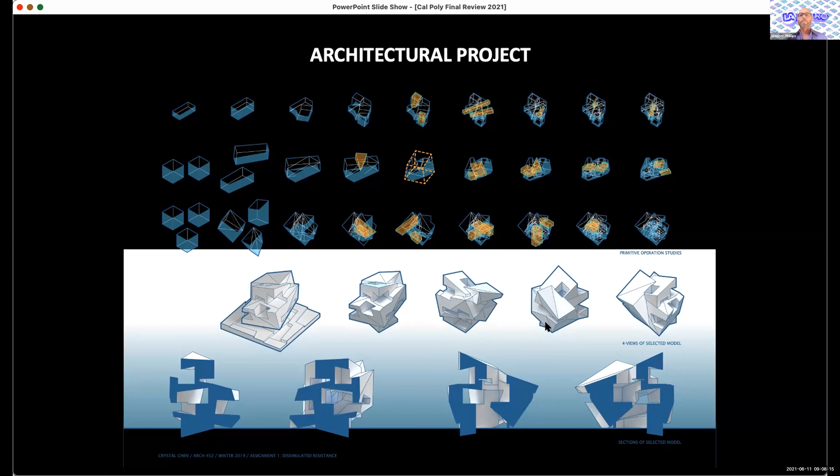So we then developed these ideas of an architectural project to kind of enliven their architectural skills, mainly thinking about spaces in between, inside outside spaces, and also how those spaces might relate to a site or an environment in a very abstract manner, pretty much surrounding mostly computer solid modeling. That's just to give them some language skills and some interests and some graphic sensibility that's all their own.

We then add in a building program separately, comes in later. And this one is actually a smaller program for us. Usually we've gone up to 1.25 million actually for our high rises, but this one is a 210,000 square foot low rise project. It's a multi-income housing. It also includes a small hotel with boutique and transient housing built in.

Also has social and health services available on site alongside creative office spaces and retail. There's also a substantive - half the program is provided for public landscaped open spaces and spaces in between, so courtyard type spaces, things like that nature. Pocket parks, 210,000 square feet, matching about the 210,000 square foot of the building itself. So we're looking at about a 50% porosity.

Parking underground with mechanical, there's about 60,000 square feet of public commercial program, 50,000 square feet of flexible creative office space, and 100,000 square feet. So half the program is housing. Half of that program is really mid-low income affordable housing. And then it's matched with transitional family housing, high mid-income housing, and then the boutique and the transient hotel.

The point is to try to create a very multi-income environment, very mixed use, and that has been sited in Echo Park, Los Angeles. Those familiar or unfamiliar with Echo Park, it's a very beautiful little neighborhood near Chavez Ravine, near downtown. It's had a very long history, actually very multi-cultural and multi-ethnic, but it's been struggling with gentrification for the last 15, 20 years. There's also challenges with the way the city's been treating the homeless, which came to a head at Echo Park Lake earlier this year.

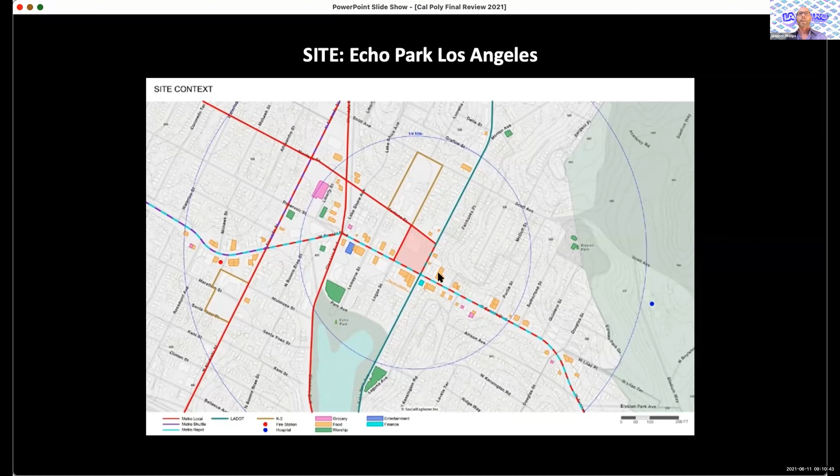We picked this larger lot, which is mostly a parking lot, but also has a Walgreens and an organic food store. This gives you an idea of the location, kind of an artist bohemian community, all mixing together. We're right in this big corner location, trying to keep ourselves within the 4-story maximum of the local neighborhood, about 45 feet high.

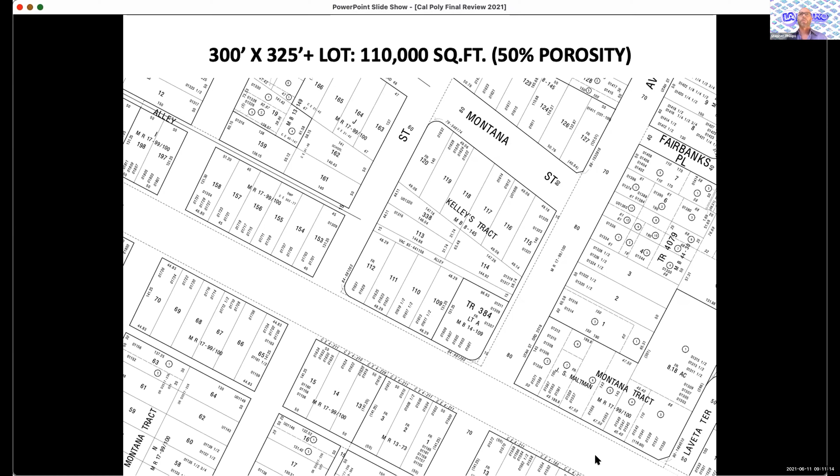This gives you an idea of the tract. Here's Sunset, here's Echo Park. There's basically a small school over here, mostly residential on the backside, and then there's the commercial area with a very pedestrian sort of neighborhood on the front.

So with that said, the focus is a little bit on these spaces of the in-between, things that happen between the different programs, and how you can turn those into spatial opportunities. We look also at architectural concept, form and material. We look at urban concept of site strategy. And then ultimately there's a socio-political conversation that comes up, in my opinion, surrounding organizational and programmatic concepts as well.

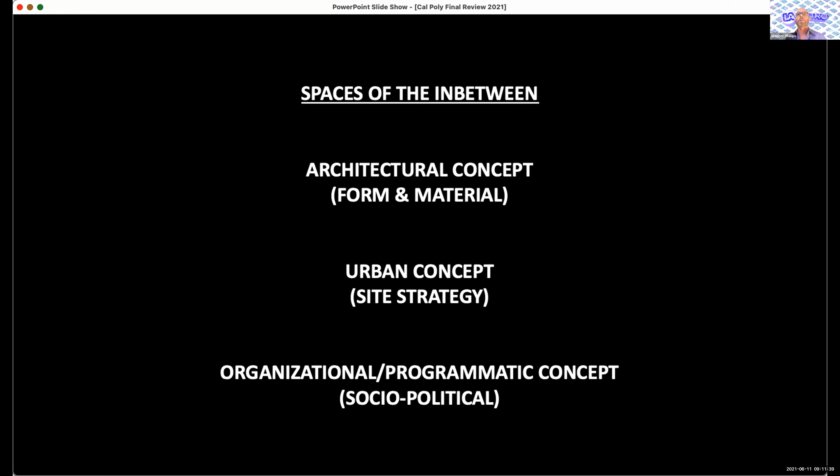Hello, everyone. You see the screen? The slideshow? Okay, great, perfect.

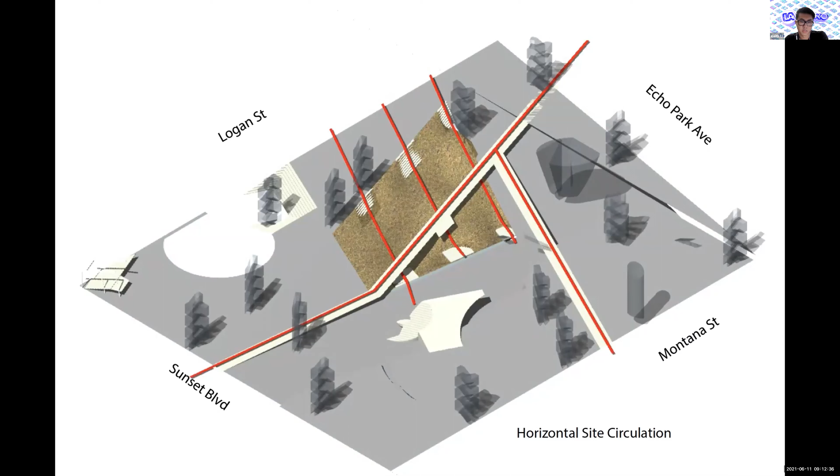Hi, my name is Keith, and for this proposal, I am looking at the idea of starting from the ground, having a softscape in the center of the site, and having a path that cuts through the site with multiple points of entry and access, and various ways of vertical circulation that connects to the ground.

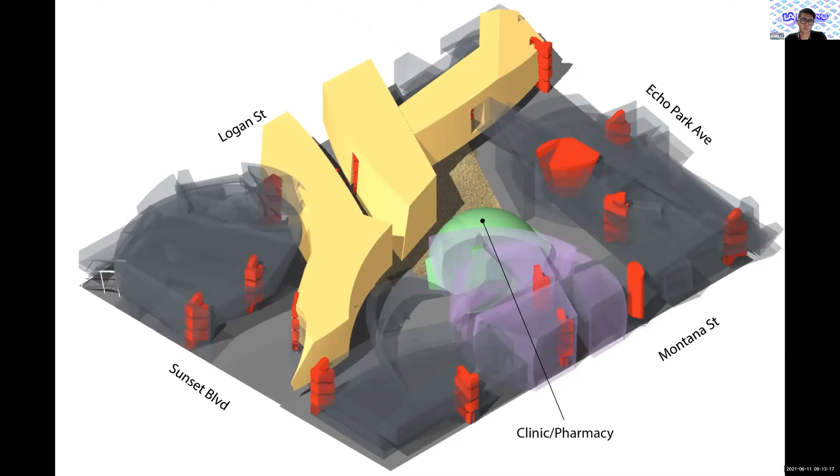The housing block will be near Logan Street, weaving to Sunset Boulevard, and facing Montana Street is a transitional housing and hotel. In between the housing block and the transitional housing and hotel is a clinic pharmacy that's open to the public. There will also be offices for different organizations and for the tenants and people living on the site to use.

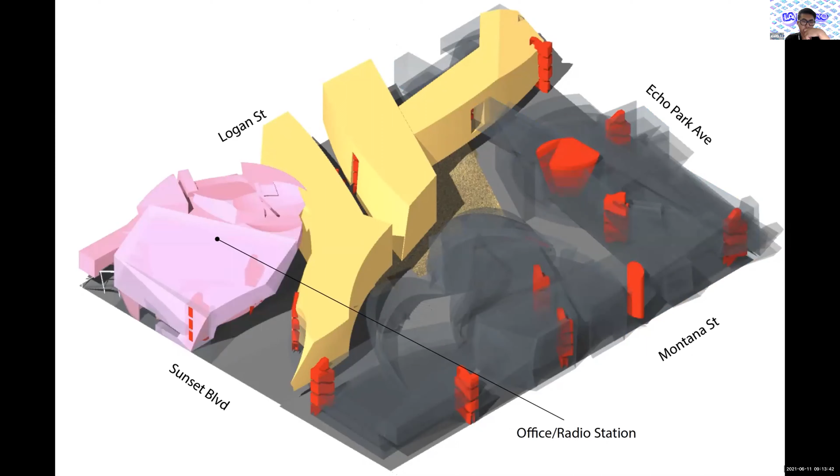A mix of offices and a radio station on the corner of Sunset Boulevard and Logan Street has a connection to the housing block. Having a boutique hotel facing Sunset Boulevard provides an opportunity to connect with a sponsorship kind of relationship with the radio station, a public radio station.

A grocery store facing Echo Park Avenue, and restaurants and coffee shops on Sunset and Echo Park Avenue. On the ground floor, the main path cuts through the site, and the radio station is up on the corner of Sunset Boulevard and Logan Street.

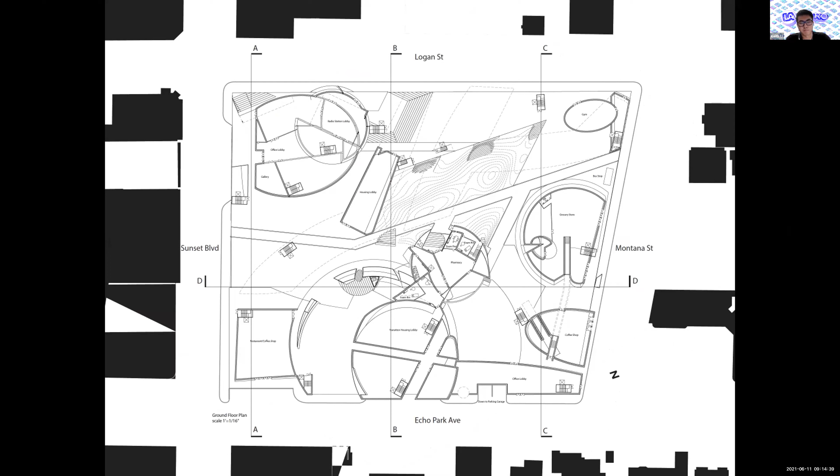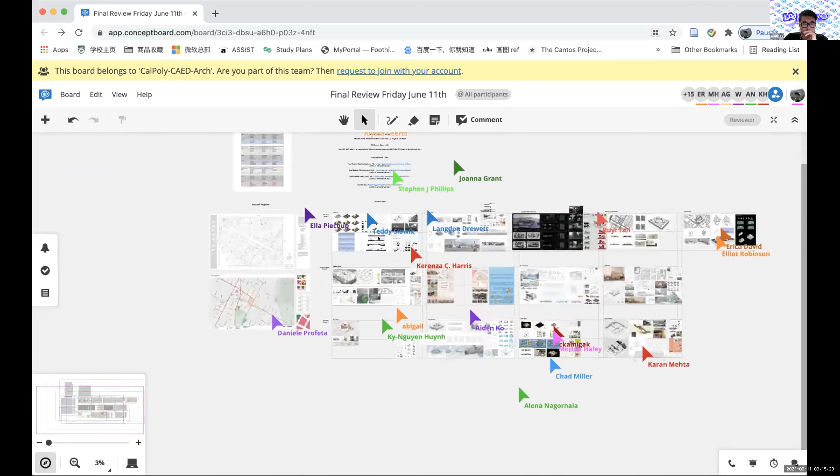There are various sections that show the relationship between these blocks, and elevations that show the four different faces of the streets. This is the concept board.

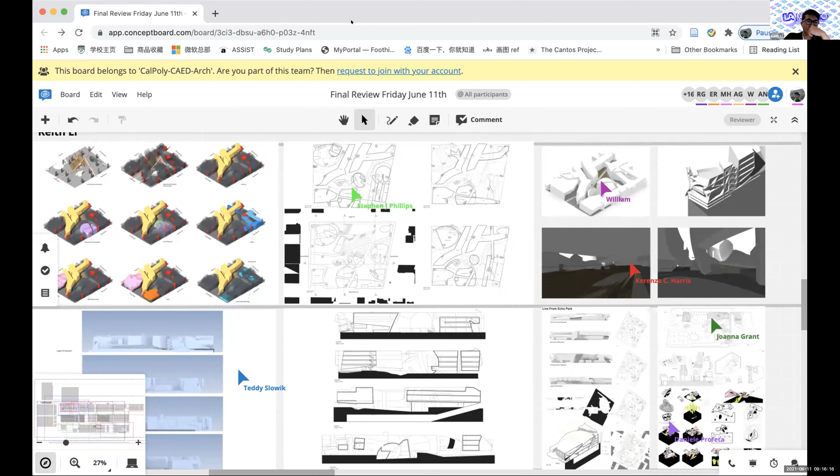Sorry, so you're through with your presentation? Are you? Yeah, I am. Okay, just making sure, because I was wondering for a second if you were ready for us to start.

I have a couple of questions, so I get the formal operations. I even think I understand the kind of distribution of program on the site. But I guess when I first saw one of the earlier images, it looked like you had this series of stairs, circulation towers, almost like a lava lamp, this kind of field of stairs. I thought it was an interesting idea, but I also thought they were going to go all the way down to the garage.

You're essentially saying you have these series of things that take you up from the parking, and each time you come up into a kind of court, sometimes at different levels. Each one can have its own entry level. But it looks like they start from the parking lot up. Is that correct? Or do you see them as kind of cores or anchors that go all the way down? Yeah, the red ones that you're talking about.

This mute thing—so do those stairs go all the way down? Yeah, the red vertical cores take you from each different program down to the same ground level. Okay, I see. Let's go back to the diagrams.

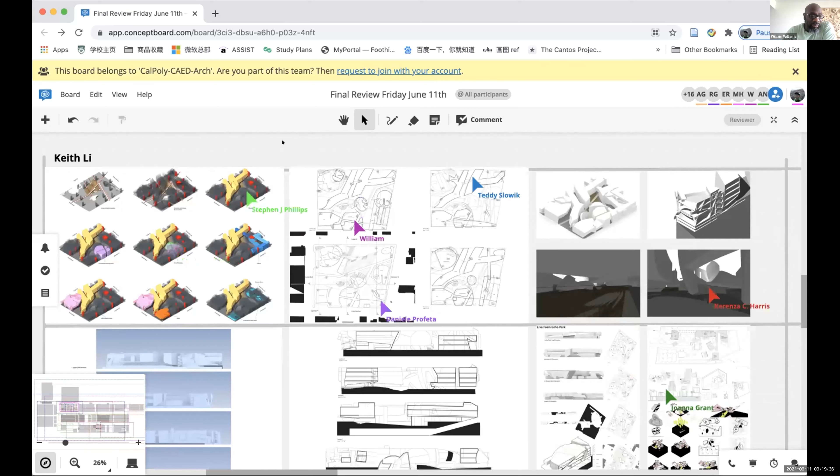Yeah Keith—oh sorry, go ahead. I was just going to say, I think that might be the problem, right? It's difficult to give a critique on something that is so opaque in a sense, right?

You're not really allowing us to make a connection between the operations you're making—let's just say formally—the relationships, the forces acting on your site, and the things you've decided to pick as either input or seed that begin to create a systematic approach to the things you're dealing with. And so formally it looks like something, but you're not exposing the relations or the things you've operated on that created that final version of things, right?

So as a formal diagram, for us it's very difficult to decipher. If you were an artist making a sculpture, you could say 'that's it, I'm done'—you understand it or you don't, that's not my problem potentially, right? But as a student architect, we want to understand, and we want to make sure that you understand the procedure, the process you've established yourself and how you generate form in this particular condition.

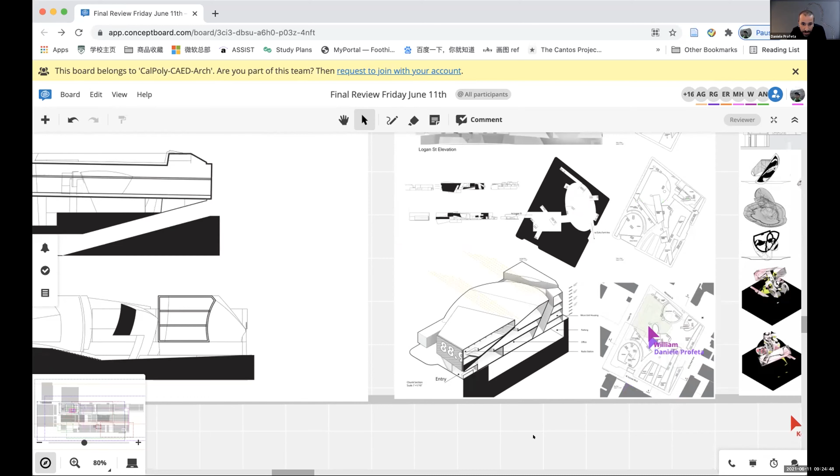And then once you pass this first layer, we're able to notice this much wider and broader organizational system that opens up so many different opportunities in terms of programmatic occupation and ways of using this interior, this courtyard of sorts, which I think is really beautifully highlighted in your sections, right? When we start seeing the possibilities of passing this initial block, this initial threshold, and then we can see the expansion of this interior.

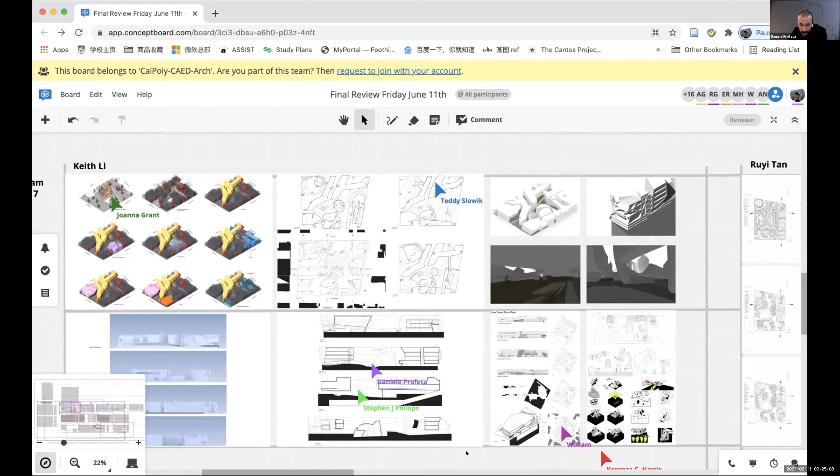Volumetric strategy. So if the studio, besides the programmatic and site logics, was asking you to think through the logic of the in-between, I think there's the seed of a really interesting proposition where you're multiplying the in-between logic. There's the in-between of the entire block, and there's the in-between of each of these individual elements.

And then I also really like the way that, going back to this ground floor plan, you're able in some instances to create continuities between these individual blocks through these axes or figures that maybe are legible as an absence connecting these two larger volumes, for example. So you're able to create this in-between connection not by adding more and more stuff to your composition, but rather by creating gaps that in a way reconnect these masses.

So all of this, I think, is very promising, but I do agree with the comments made until now that once all of this interface is constructed, being able to go in and articulate the potential of all of this organization is really paramount, because otherwise, I'm dying to have you describe how this retail market, for example, this is just a silly point, but how the retail market begins to be broken apart and produce this movement between interior, exterior, and then feed into the transient hotel lobby.

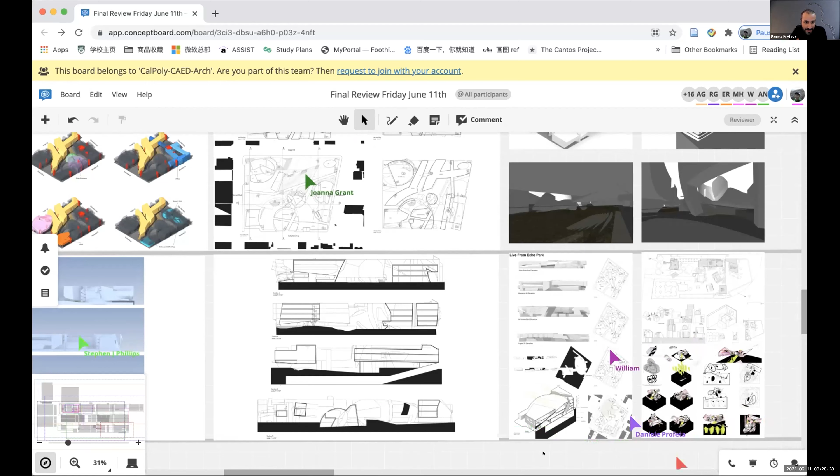What's interesting is that you were just referring to his mid-review boards from April. There's something about the way those were represented and developed that suggests the way you spent your time redrawing or rethinking maybe didn't help or advance your project. Because I look at the radio station, and already back then it was a far more developed building in terms of how it presented itself than what I'm having a hard time finding now. Even the way you gave it a touch of structure, or signage.

Even the idea of putting signage on it had an argument that I don't know if that's still there. It's hard to tell from those elevations. It's almost like you spent a lot of time developing a Rhino model but didn't deliver the logics outside of it. I mean, actually, I like your ground plans. I think your plans are your strength of delivery of conversation. But these were stronger. Even the way you showed your elevations was stronger back at mid-review.

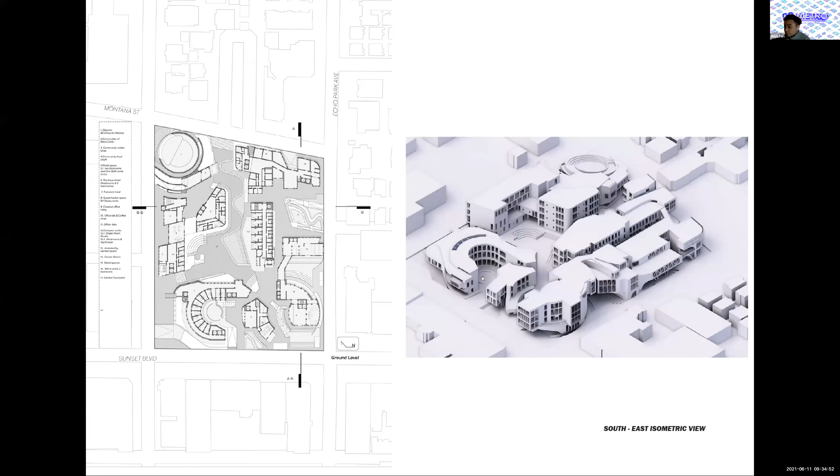Most of the programs start to happen on the second floor. Programs are more about addressing and responding to the site conditions, such as the daycare, because of the schools and institute nearby. This area is kind of quiet, so I was thinking to have the community spaces located here, and then the mixed types of housing and office complex would be located on Echo Park Avenue because of the business happening there.

The intersection shows my idea of cantilevering the building to make it more accessible on the ground level, and then trying to maintain the idea of cantilevering in some part of the building.

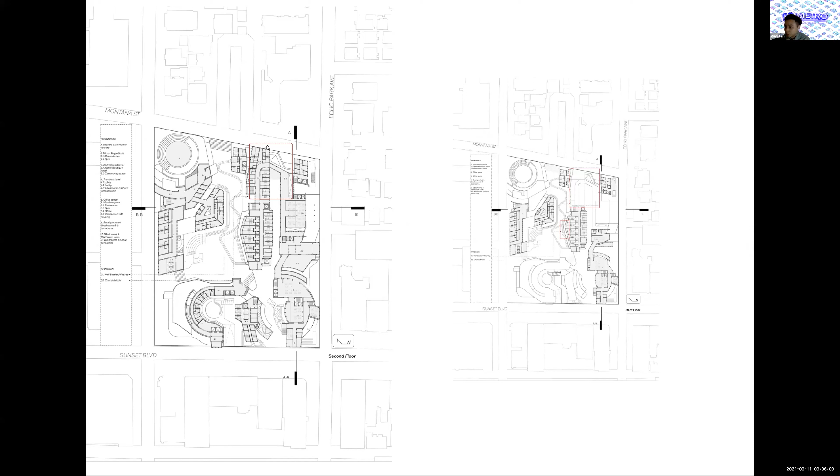In the chunk model, the loft housing is cantilevered up, and some retail and coffee shops are on the ground level. In between is the mezzanine garden space.

I'm using the wooden screen facade on the housing to differentiate it from the office, and these are some attempts at using the wooden screen facade.

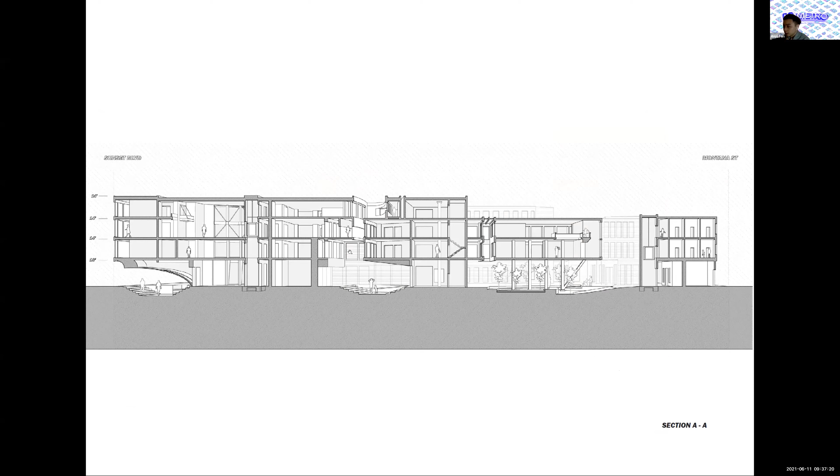Last but not least, the section shows how my cantilever idea plays out, and some of the spaces happen in between and under on the ground level. And that would be it. Thank you so much.

On your big renderings, you're showing a wooden facade, the one that shows the corner of the street on your board, but that one doesn't have holes in it. Is it residential as well? Yeah, it's residential. But it doesn't have the cutout that you're showing on your chunk models. Is it a different strategy? Because I did it in the last minute.

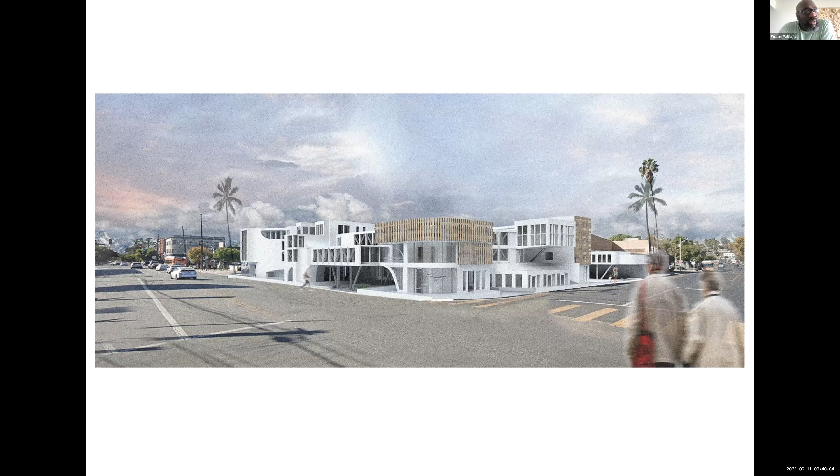I wonder if there's enough. I actually really like setting up those moments, but I'm wondering if it's not a little crowded. Sometimes there can be so much going on that nothing's going on, and I think that could be a really special moment. It's actually kind of an odd moment on a corner like that—odd in a good way. But I think it needs a little more room to breathe, if that makes sense. It feels like it's a little impacted by other parts of the program. But there is something interesting about the scale of the project, and I really appreciate the changes in texture.

I agree with William. I think when everything is operating at 100% everywhere, you lose a little bit of the special moments, as he said. It's hard to visually focus on something. I think you have a good handle on your language in terms of what you're trying to do, and how you're documenting it shows you understand the relationship between your plans, elevations, and section pretty well. So it might be a moment to step back and say, where are the highs, where are the lows, and bring a hierarchy into the way things operate.

Part of it for me is the disconnect between this wooden facade and the white building behind it—I'm not saying it's wrong, just that something doesn't feel completely right in how they interact. The second thing I find disruptive is that all your fenestrations happen at the same scale everywhere, which normalizes the whole thing instead of letting the programs emphasize or separate something special. Those are subtle things you can do outside of the actual massing. The idea of the cantilever is a great idea.

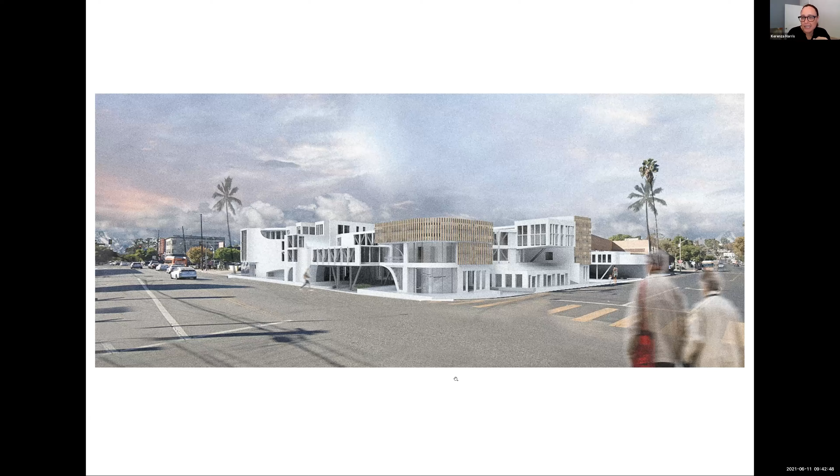I just think, because everything happens at the same time, at the same level, it's hard to pick out. What's super interesting, and what you're probably super timid about, is when you start carving the ground, delaminating this building a little from the ground condition.

That relates back to the rest of the community, in the sense that you're filtering the urban level, which is human scale at the ground level. It has great potential to filter, not that it's accessible for everyone, although you have public spaces. It would be interesting to see how you could create a network, a more global approach to these carvings, how they connect to each other, inside and outside the site, and how they function programmatically.

I think that's almost a very timid approach that you have here, but with the cantilevers and the articulation of your building that create these pockets of exterior spaces, let's call them that, I think there's huge potential for pushing that forward.

Yeah, I mean, I think Rui, this is really a great project, and I really appreciate the work and the way that you described your proposal.

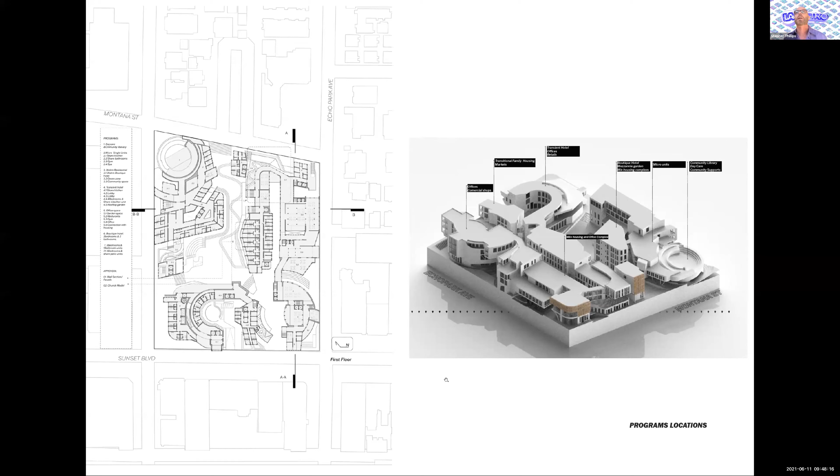If everyone can get to his mid-review board, it's up in the upper right area. There are these pink axonometrics and a section, and also some really interesting diagrammatic plan strategies. For me, there's something that shifted, which I don't think shifted for the better.

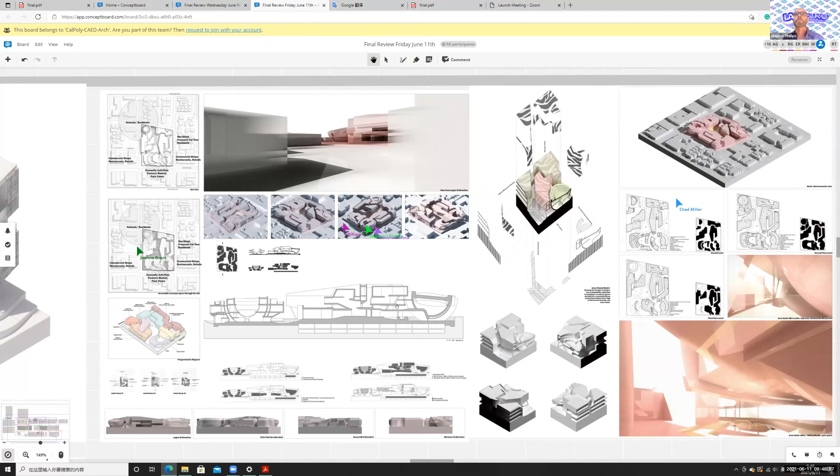I think it had to do with when you started developing the housing area, you took that into the commercial area, which used to be these large round shapes, almost like mini apples. They had a relationship to the corners in an interesting way, and set up a fundamentally different approach to the institutional property on the two corner ends that shows up strongly in the section too. Are you guys with me?

Yeah, and then you see somehow, your development skills are amazing. Your wall section is beautiful. All the detailing in your axo really well worked out. Very impressive — you've made it through all these elements.

But then when you come to the corner condition elements, and I look back at those featured items, they've dissipated into this blur — I think Karensa hit it — like all the windows are the same size. You wouldn't know that's the office versus the housing anymore. You might as well put the wood sticks on it there too. It's somehow within the formal logic of it.

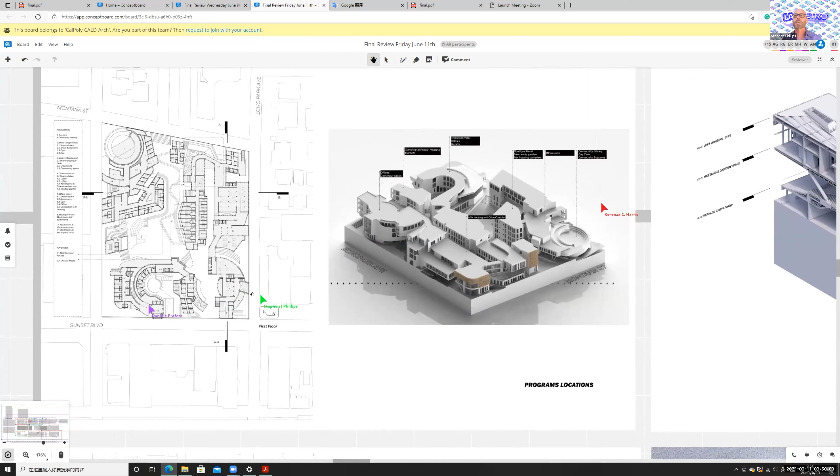It's still — there's a reference in the plan. I can see the plan tried to hold on to some of those characters, but it lost its character. And that really shows up in the AXO.

I'm not really sure where that happened or why, but I just want to point that out for your future work. It's like a forest tree thing — once you got into the trees, you just really ran with the trees to such a beautiful level. I think maybe Daniele just mentioned it, or someone said you need to step back and just look at what happened and what got lost.

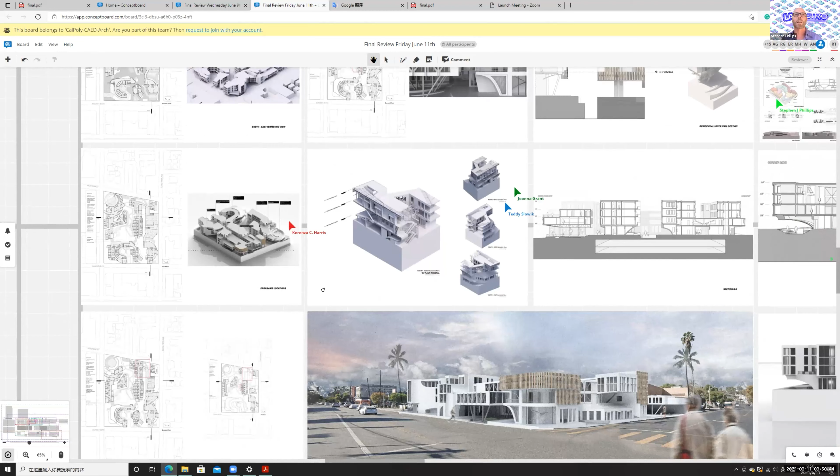I think it would make it more powerful if it carried a little bit of that iconic nature in the areas that needed to be, or could be valued as iconic. And maybe you were scared by their shapes — they look a little frightening in section in terms of their development capacity. They're very upside down circles.

How do you occupy that or use it? Are those public spaces? Are those rain gutters? You know what I mean? I don't know what they are. And maybe there's something that got lost there out of fear.

I'm not sure, but I think overall your strategies were so clear — even the diagrams of your strategies were clear — and it just got intensified to the same level, which looks much more like housing than institutional. I mean, I've always loved your project, so I'm just pointing that out.

Well, yeah Steve, I'm actually curious to what extent it's because of the formal operations — the boolean operations, the plasticity of it, carving, filleting the corners, even the round ones. There's always a challenge to go from that, to translate something so carved, and then come back and make this more skeletal thing.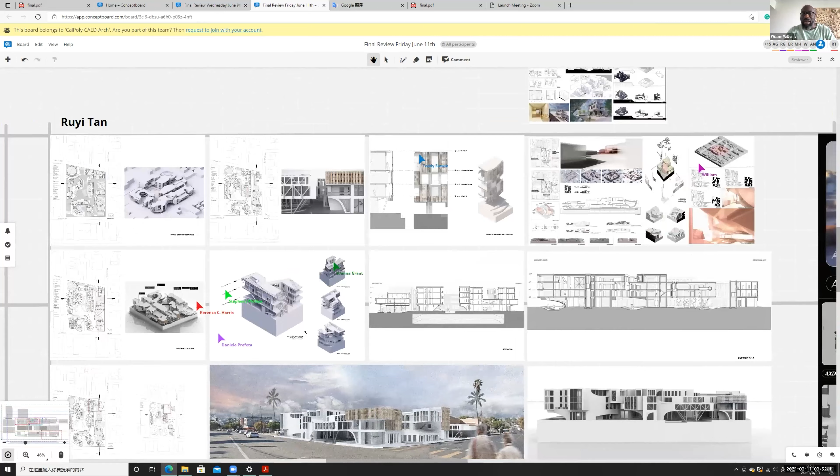So when I look at the drawing just to the left of the detailed section, at that point it starts to lose its plasticity. I'm not sure you could avoid that — there are ways — but I think you'd have to find a way to make it almost more of a scrim or screen, something that can hold itself as a form yet still allow in light and views, or more operable pieces.

So I think there's a real formal challenge that's not easy to overcome for anyone really, but this is really tough because when I look at the mid-review project, I actually think some of those are pretty incredible forms. I just don't know if the translation can be done as easily.

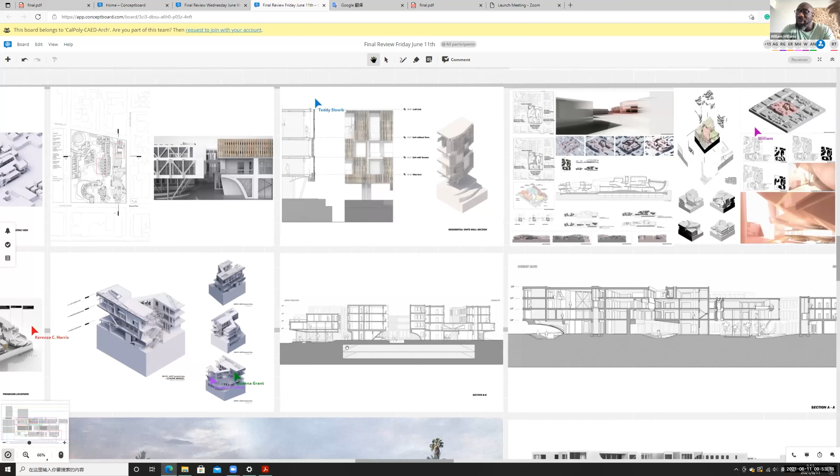Even the cantilever loses a little bit because the space created by the cantilever is almost matched by the other space just on the right of it. So I'm not really getting it as a kind of pure spatial composition. Anyway, I don't think I'm helping in that way, but it's useful — I do think there's something in the translation from the plastic boolean operations to the much more skeletal framing thing, which has been really hard to get to.

I rarely talk on these reviews, but if I may add something to what William just started — if you go to the second board, the one which is now in the upper left corner, the second board.

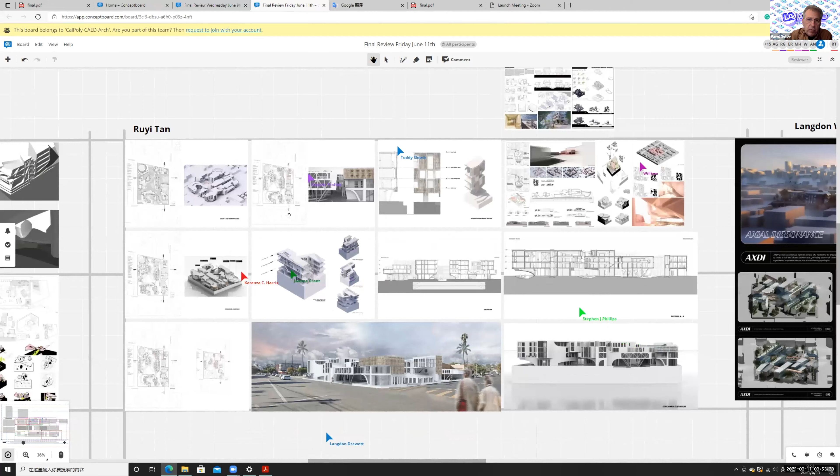Yes, that one. Can you just zoom on it, please? This one. Yes.

I mean, the project is kind of unfinished from what was said, especially for the facades, because you have something very interesting going on there. You have this hybrid tectonics in which half of it you're expressing the structural element, making an architecture out of it, and on the other side you have screen, and they're kind of blending, with different programs on this project.

Obviously the criticism here is that the facades are looking very uniform, which I totally agree with. I think exploring this language, which you've started, is not just a formal language, there's a lot to be explored formally but also on a practical and functional, expressive level, like what you're covering with this, are they operable, as William was mentioning. There's a lot to be done there.

It's not purely a skin job from here on. I recommend you, and I don't know how far you're going to go with your project, but this is something you can explore further, at least to develop it, because that's the missed opportunity - these ideas which are starting here could be extended over the whole envelope of the facade.

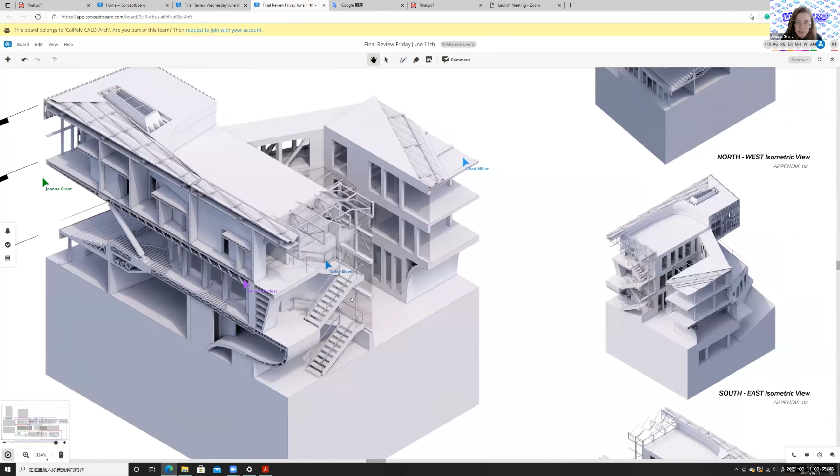The way that you've sliced elements of the facade away and revealed what's beyond might have been a strategy you could have applied to developing these elevations in a much more rich manner. It's kind of in the lineage of deconstructivist work, which I think is super nice in terms of taking this drawing and taking some of the logic and design strategies from it and applying it elsewhere. That could have been a really nice way to utilize a drawing as something which produces design, not always necessarily producing documentation, which could have pushed your project forward a little bit more.

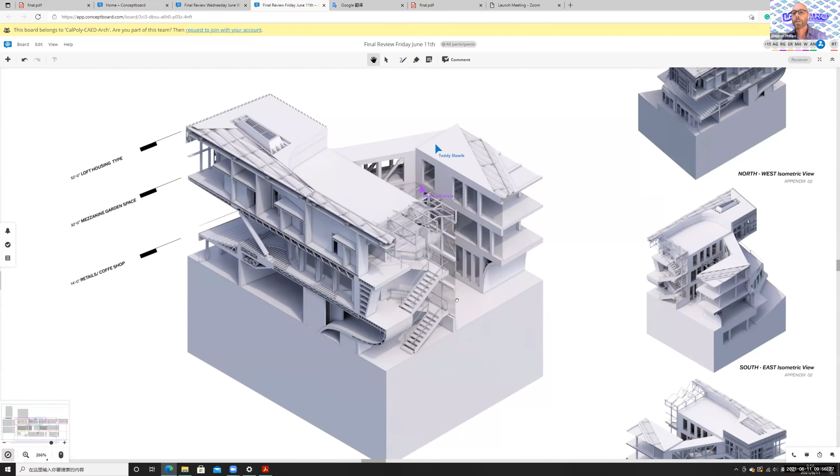It's a great last comment. Thank you, Joanna. It's a very, very strong project and a great amount of work, and really appreciated. Hopefully some of this will find its way into your sensibility as you move forward. The tectonic structures thing was actually quite interesting too, to see that.

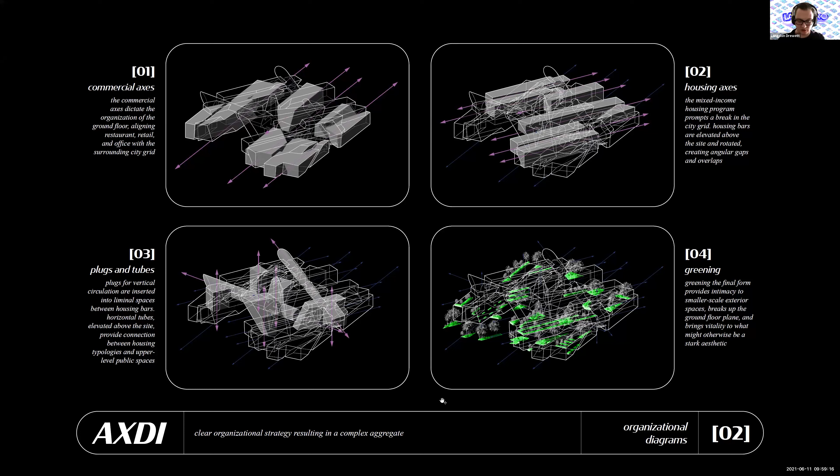Moving into the floor plans, here we can start to see the breaking up of the ground plane due to the process of greening and also the addition of some level changes that start to create a more meandering central avenue through the site, which to some extent serves as a cut through, and also promotes engagement with people walking through the site.

You can also see here the general site strategy of holding the Sunset Boulevard and Echo Park Avenue corner with a large corner retail spot, and then the Logan Street and Sunset Boulevard corner is opened up to initiate entry into that primary site avenue.

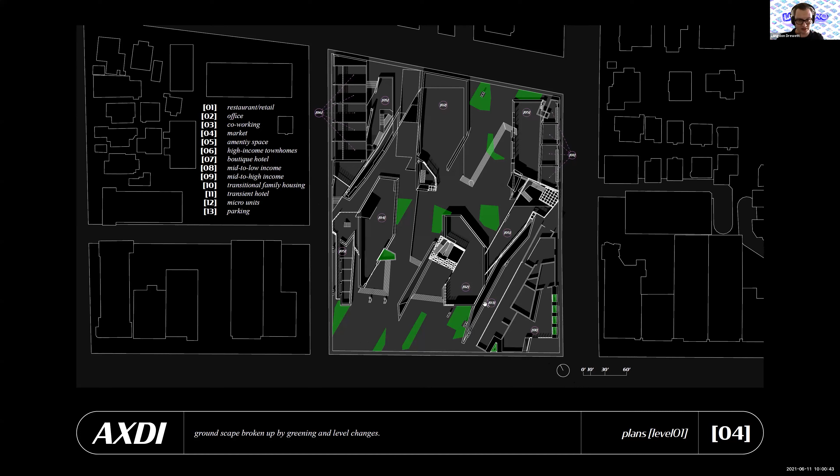Moving up to the second floor plan, you can start to see how the housing bars lay across these intersecting axial lines, creating points of intersection where the vertical plugs appear. There's also bridging happening as these housing bars span across the mass on the ground plane, as well as tubes providing connection across the different housing types. A similar story on the following two floors.

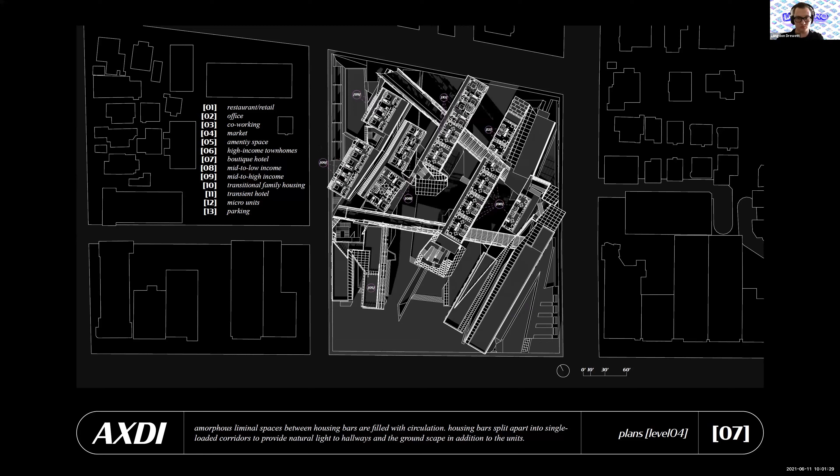Moving into the next section, here we can start to see the formation of the housing bars, which have been split up so they're each single-loaded corridors, then pushed apart to create crevasses that provide light through all these circulation spaces and down into the parking area below, so it's not so dark and dismal. These moves also provide minor pathways below at the open spaces left over by the ground plane masses and the housing bars above.

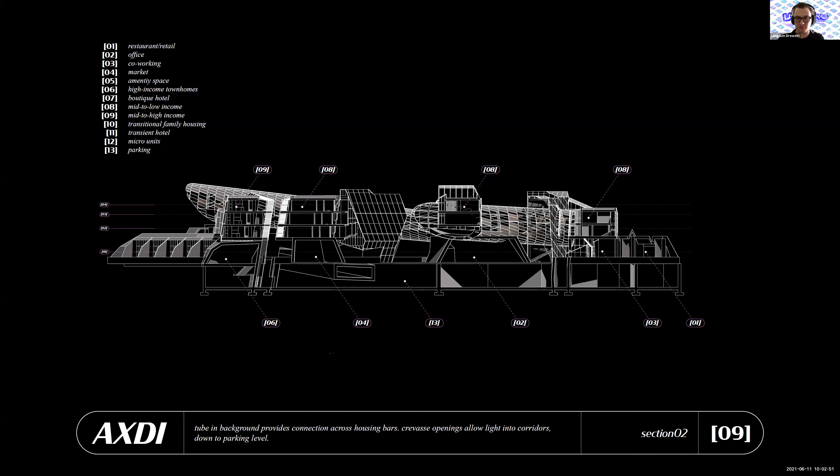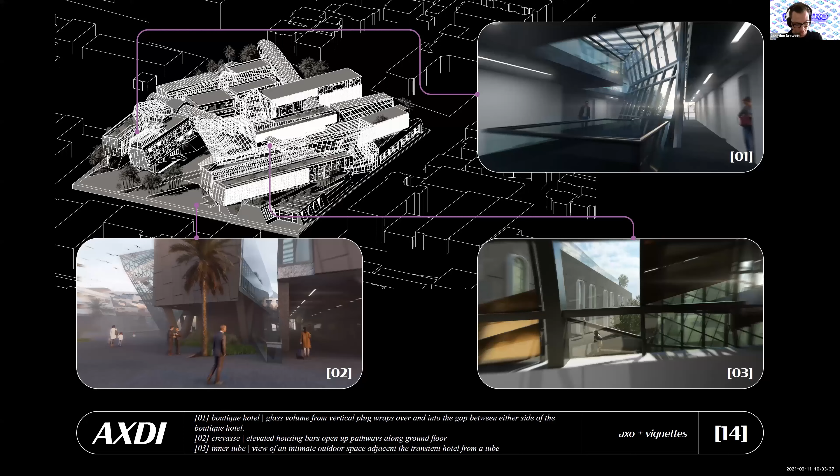Moving to axo and a series of vignettes that try to show how these different strategies are actually working in the project.

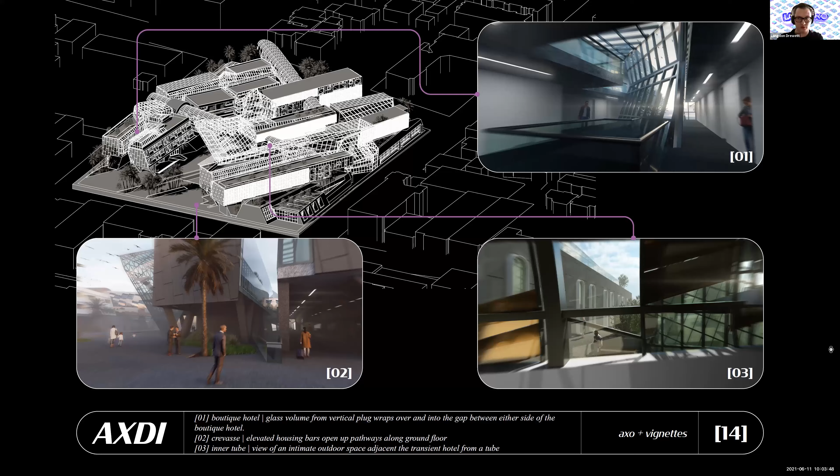Moving to the first vignette, which takes place at the Boutique Hotel, you can see the glass form from the vertical plug reaching over and down into the split between the two bars making up the Boutique Hotel, for this nice circulation atrium-esque moment.

Next we get a view of one of the crevasses, with these elevated housing bars leaving space for minor pathways along or through the site, as well as a closer look at the impact of the greening and the materiality.

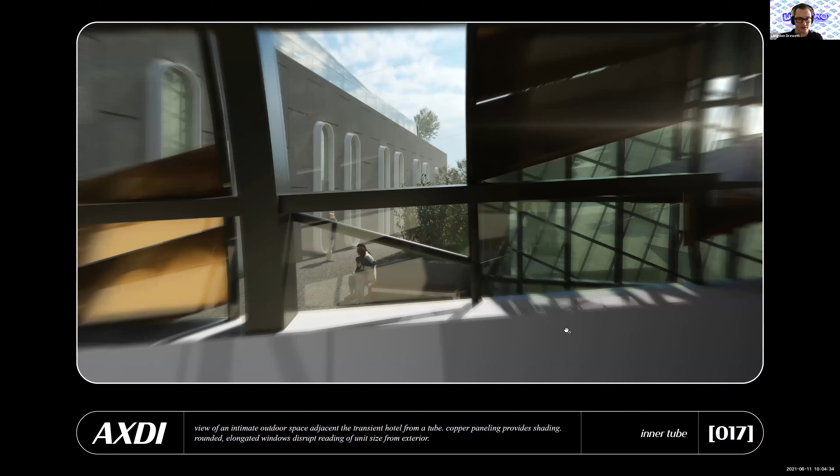Finally finishing up at this interior view from a tube, getting a peek at another more intimate outdoor space that resides by the transient hotel.

And then I will leave you with a quick little fly-through animation of the project that highlights the edge conditions and also the primary avenue through the site.

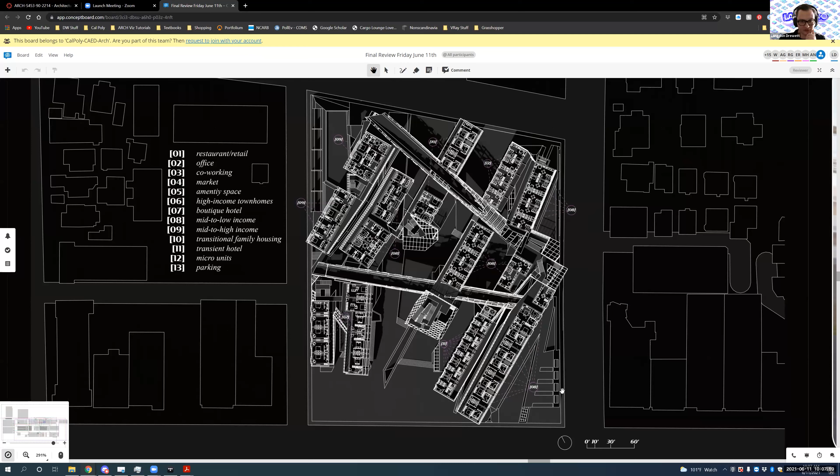Yeah, let's go to this plan here. I would say the plugs, the vertical circulation, are about being in the midst of more normative housing bars, to create some fun moments with dynamic stairways and interesting form that make it a really engaging place to be.

A similar idea for the tubes. The tubes originally I left large enough so that they could actually have potentially two levels of circulation in there, and could fit some more program such as a gallery space or something, which unfortunately I did not have time to show anywhere.

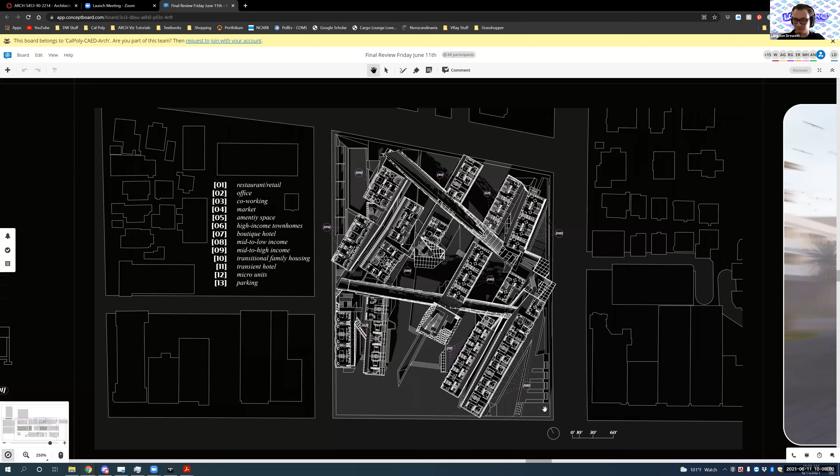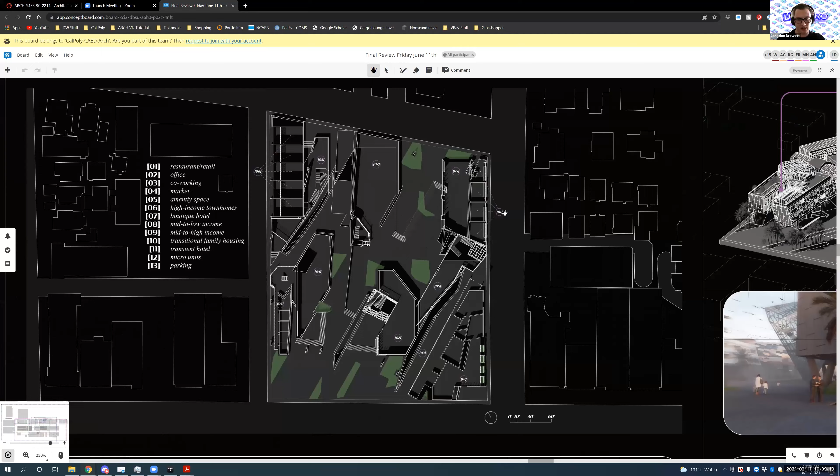But the idea was that they could provide additional program between the housing, and also provide connection across the disparate housing types that, given the mixed income nature, these people might not otherwise have access to each other. It's also intended to provide access to public transit, which is primarily occupied along Echo Park Avenue with several bus stops, and then a few on Sunset Boulevard as well.

Does that answer your question? Yeah, I mean, thank you. Of course.

The reason why I was asking is because between those two elements, I really appreciate the role that your plugs have in mediating the two axes, or the multiple axes, that you construct on the site.

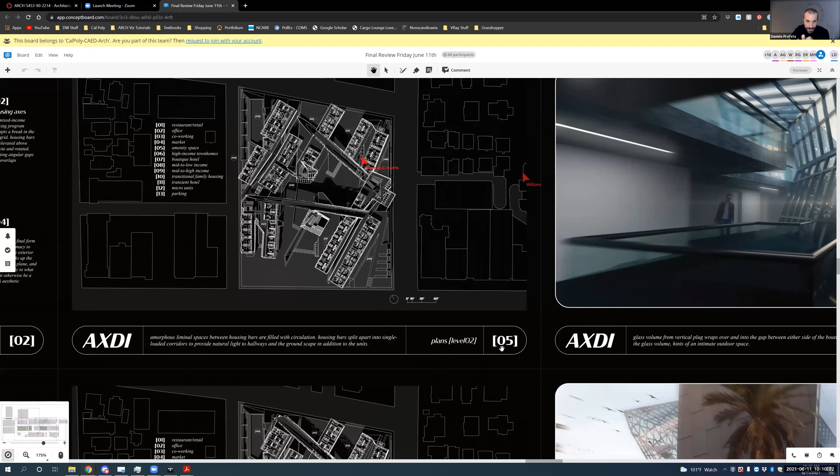I like that one of your vignettes highlighted the transition of the more solid mass. In the plan you can see how they're always positioned at the beginning or the end, almost bookending the intersection of these different axes, and they act as this beautiful element of negotiation that sometimes embeds itself into the heavy mass of one of these bars, and sometimes protrudes outside to produce this different kind of public space of occupation, which I think is really exciting.

But I'm not really convinced about this sculptural, overly scaled set of tubes of connection - they seem to be a little bit undermining the overall strategy. The idea that this is additional programming space that allows the different income housing to finally be connected is a little bit - I don't know, is it necessary that one block is for one type of salary and another block is for another kind of income, and then you need these big tubes to connect them?

Could the different typologies of units be a little more intermingled in the bar itself to produce this kind of programmatic porosity that you're after, without having to add these foreign pipes in between them?

That's the part I'm a little confused about, especially because the moment they penetrate the bars, that's the only place in your project where the interaction you're designing between these parts seems a little passive - they just intersect with one another, both in terms of facade articulation, apertures, and volumetries. That's the only thing I'm dubious about in the project, and I'm curious to hear yours and other people's opinions on this.

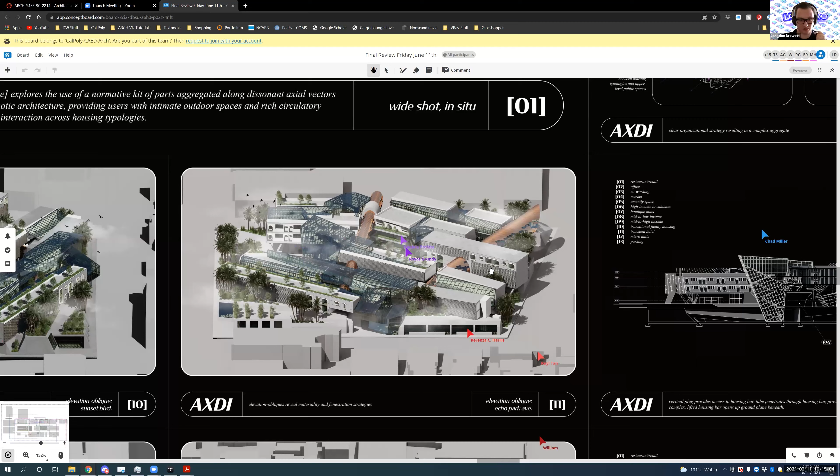I think it's a great project. Thank you. To counter that point on the window openings, I've gotten mixed feedback. The thinking was that in a lot of places they span across units or across floors to disrupt the reading of unit size from the exterior, and also, in addition to the greening, another attempt to soften the form so it's not so stark and imposing.

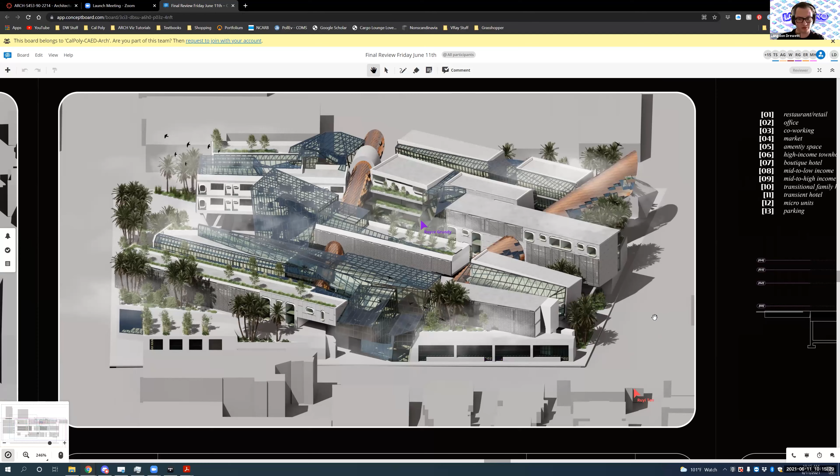I'm not sure what's wrong with stark and imposing. Also fair. Also, greening—it sounds so much like greenwashing.

Is it? I think there are different ways you can do this. I love the way your base volume, the commercial one, seems to become one consistent element with the grounds, almost as if you're thickening the infrastructure of the ground, and it disappears into that layer. If you start thinking in that sense, the greening or relationship with a softer ground doesn't necessarily have to result in linear patches of green, like a triangular place for palm trees.

I think it can be a much thicker understanding of what that mass does for you, right? It reads as something you add in the end on top of a volume, rather than as a reading of the whole ground condition.

Yeah, I kind of agree. What I appreciate about this project, although I don't like the look of it much, is that it is aggressive, and the moves you're making are rough and not necessarily sophisticated in an intentional sense, right? It just rams through it. And the types of drawing you're showing, the axonometrics, flatten everything.

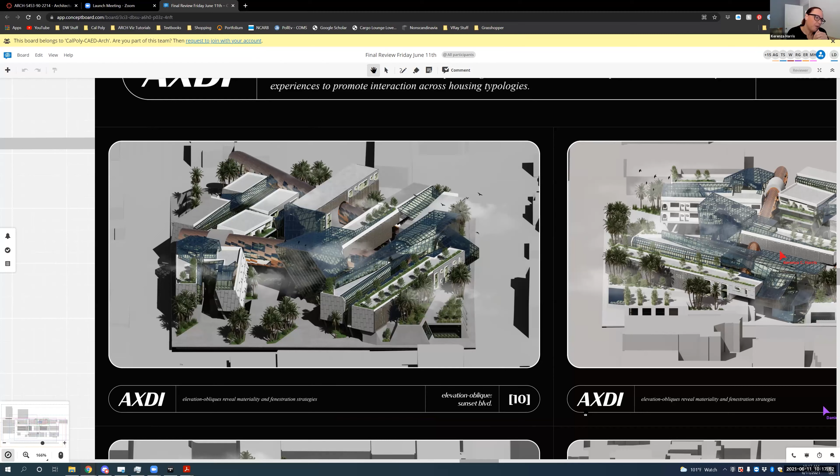What I think is at issue, potentially, is this relationship between materials, forms, and how the language speaks to how they speak to each other—all these pieces. A relationship doesn't necessarily mean they fuse or combine; it could be one where they oppose and differentiate. So potentially, a run through the whole language is needed, a tonality in terms of how much you're pushing, emphasizing, or minimizing.

And then, looking at the conversation about this tube and how it intersects with the building—that intersection is a moment you need to resolve. It's an operation on your form, and how that translates at different scales on different conditions would be one of the things I'd point out. It is true these windows have the same problem, and it potentially is because it seems like a foreign language plastered on, a little disconnected. Disconnection isn't necessarily bad, but in this case it doesn't quite work globally.

But what I also appreciate with this project is—and I know these days we're getting into immersives, which has questioned how we communicate about architecture, how we experience it in digital spaces, and how we as architects have to refine how we explore and explain spaces—even though this project is massive at a large scale, you are also pinpointing human-scale moments, showing the big picture but also coming inside at the edge, at the human scale.

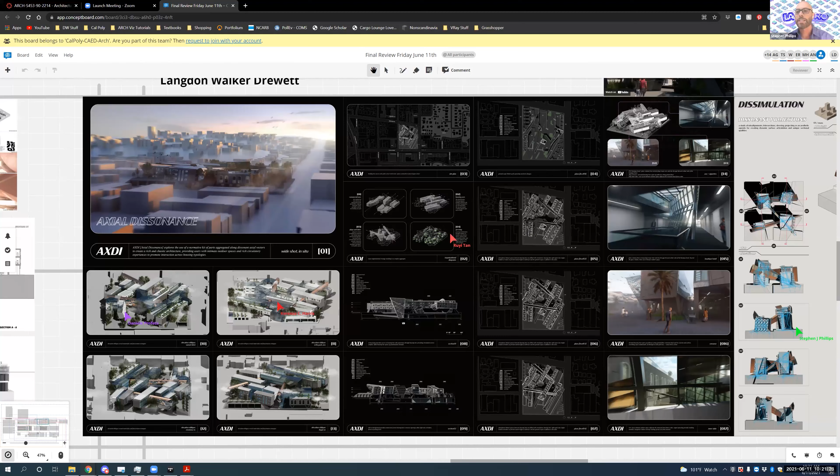Everybody—so Langdon, that's very accomplished, and I appreciate your stylistic interests, which, as Kerensa pointed out, are maybe not the contemporary stream these days that most people would go with. There's certainly not enough pink on the drawing. In some ways, I'm just being honest.

I think your holdback and interest is very provocative, and the way it got still a little dystopic—but there's something interesting about the greenery. I really like number 16; I think that's where I'm most convinced by your project.

It's a little Eric Owen Moss. There's something very exciting about what you're still doing. It seems mis-sited for Echo Park—it probably would be the most amazing project right by the Arts District or further out in that direction.

It seems more appropriate to the nature of that physical landscape, even the way you've created these weird regularized buildings with those windows no one likes, but they're kind of interesting because they recall a clash against these other almost Rem Koolhaasian Chicago-weird things happening with the tubes.

So, hey, fantastic. I think the way you drew it, developed it, landed it—the comments were right on, all the way to how the housing was probably overly distributed by type. They're all good commentary, and I really appreciate how you were able to far exceed where you started.

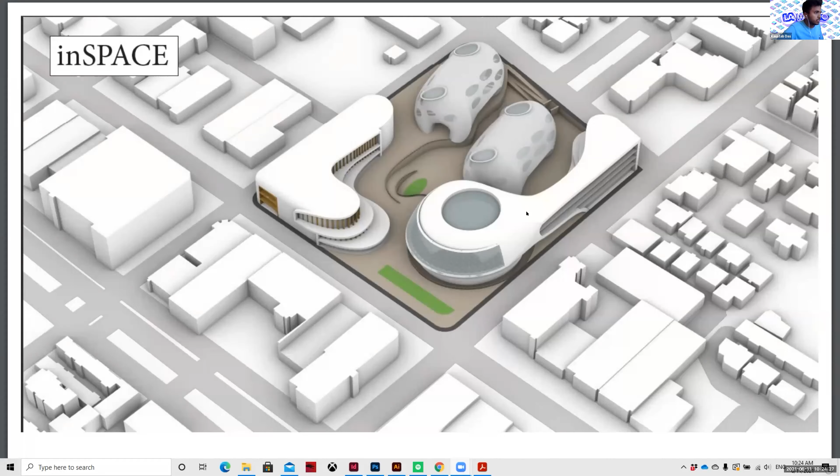So I wanted to start off with the precedents I have, like the Schindler House. I wanted to take the idea of how Schindler wanted to have social space by introducing a courtyard, and that idea that you can have an in-between space to engage social interaction.

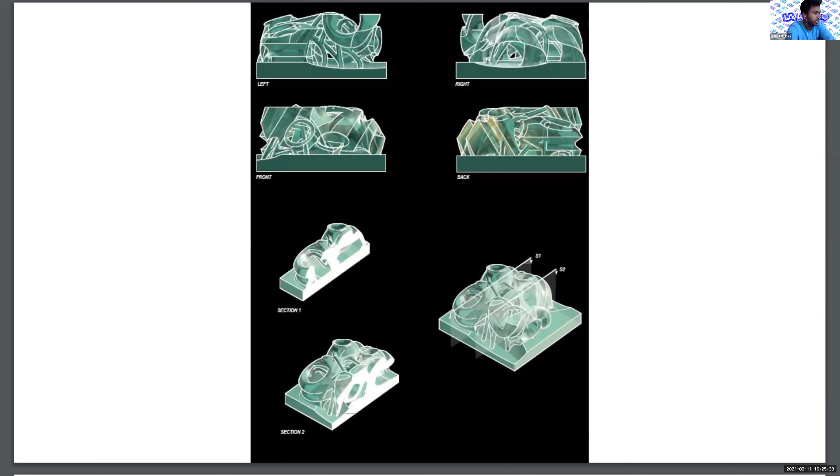My other formal idea comes from the formal project we did last quarter—this one's like a torus with a central court-like form. I took these two ideas and eventually came up with a project.

As you can see, this project has a very windy, snake-like path that leads to the buildings, which have programs of housing, hotel, office space, and public market.

It shows the sunken space that these windy paths lead to, and from there the public can access the market. You might have noticed that the public market and the hotel are right at the southern edge of the site.

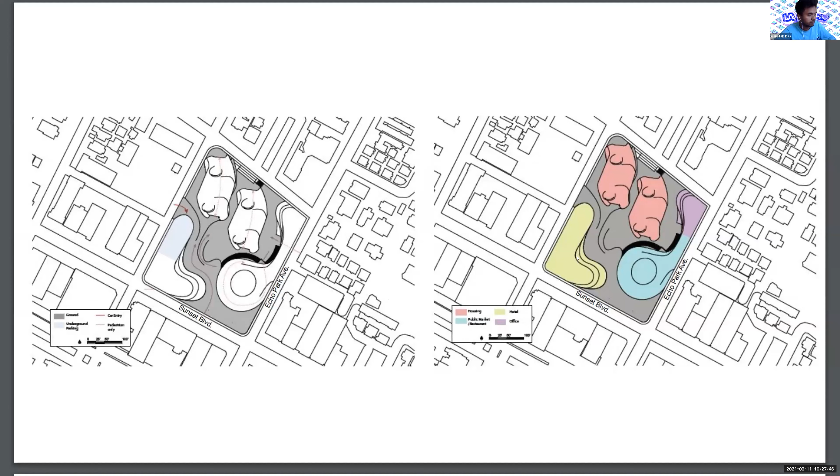That's because Echo Park and Sunset Boulevard, these two important streets, intersect on the southern edge, so it's a no-brainer that people would circulate more through these paths—hence positioning the public market and hotel programs on the southern part of the site.

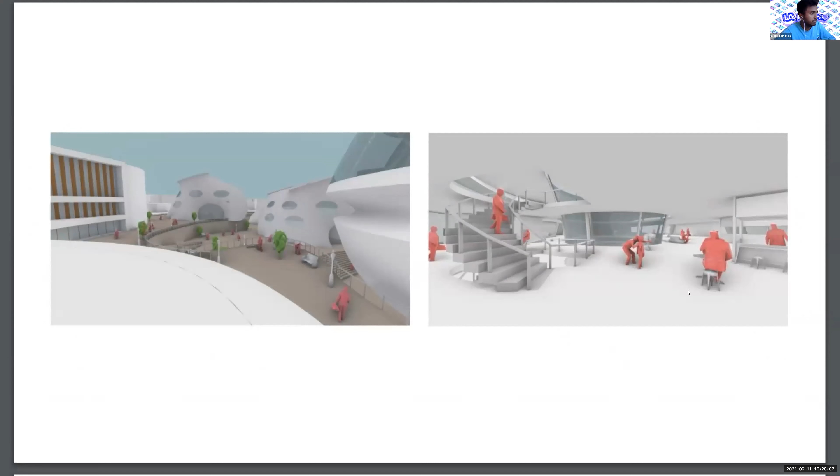Going on to the renderings, these windy paths take you to the housing and also to the sunken space from where you access the public market. This is the inside rendering of the public space of the market.

You have several different housing units, like low-income housing and high-income housing. It doesn't matter the size, they were all sized to a specific prescribed size. This form also allows me to have these variable spaces in circular forms, where I can have either high-income or low-income housing anywhere in the building.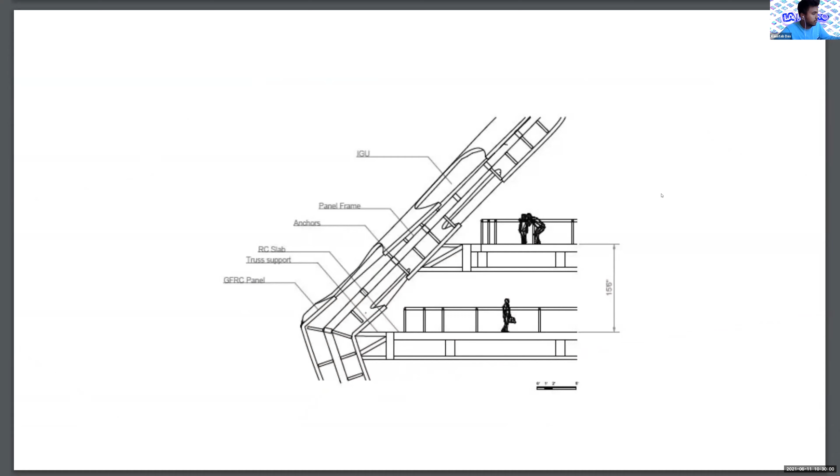I'll go to the concept board, and you can talk about it.

I'm not very clear as to what you got from the Schindler House precedent reference. Because that house is a two-family house that emphasizes a certain relationship between indoor and outdoor spaces. They're also sharing spaces between the two family units. So there's an idea here, and there's also a relationship to the outside landscape. The house is very specific, and it's also based on a very specific structural module that Schindler used throughout his career.

So there are moments in that house, things that are interesting ideas that could have been extracted. But if all you're extracting is that it has exterior-interior space, which is all I heard you talk about, to me it's like, well, it could have been anything. What is it about the Schindler House that is a unique condition he's setting up in that architecture that you could leverage in this contemporary interpretation?

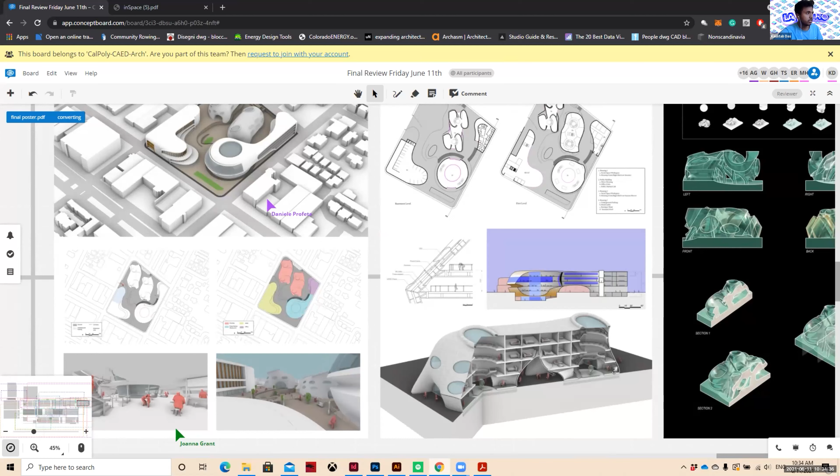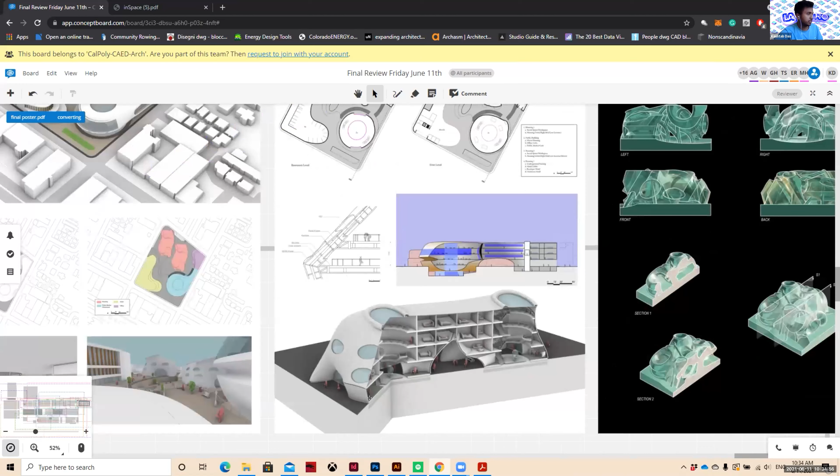For my project, I was trying to make a particular part of the building mostly public, but also bringing that public nature to the housing buildings where you have people of middle income, high income, or low income housing, as a way to bring a bit of social nature into the building with some formal strategy. And of course, you have this entire 50,000 square footage of office space you have to account for, plus almost a huge amount of space for the public market, so I had to assign a huge space for that.

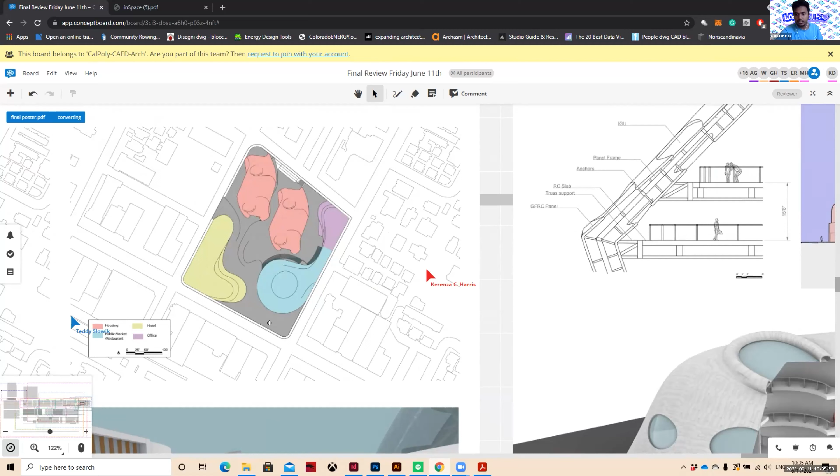So I decided to go for an entire building where I could house most of the public market. From there, anyone could access it. If it's not infused with the housing, then anyone can access it, whereas if it's infused with the housing, people outside of the block may feel like they're invading someone else's space. That's how I went about the public aspect of the project.

Can you go to your section? Which one? One of the earlier ones, yeah, that one right there.

When you say that, what I hear is that the potential is really about this thing here - the shape of it, the ability to both bring people into it, underneath it, and move through it, and where this closes it off. If I were just thinking about it as a diagram, I might have started to think about these things more in this way. I don't seem to have a very thick line here right now, but it would allow you to have moments where you're both inside and outside it, conceptually.

If you back out and go back to the more modeled section, the Rhino model section - there, where I see that potential is really when you start to do this kind of thing here. I almost wish I could have lifted up these pieces here.

Sometimes I see something and I want to just start interrogating it itself, and play with it some, even letting go of anything I've said to myself about it before. There seemed to be some missed opportunity - you're close to a couple of things, but you wouldn't allow yourself to break your own rules. I think you could be close to something. I don't know how the skin works at all, and I have a suspicion that you're seeing it as something more enclosed or locked than you should. I think it should probably be much more porous - that's my suspicion.

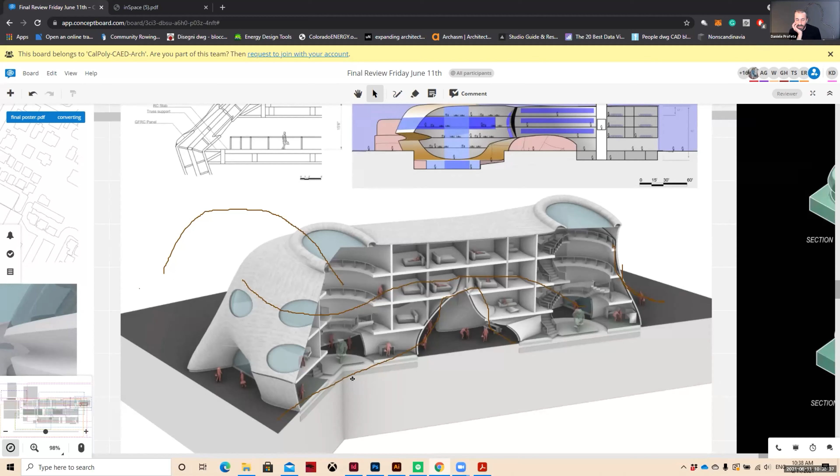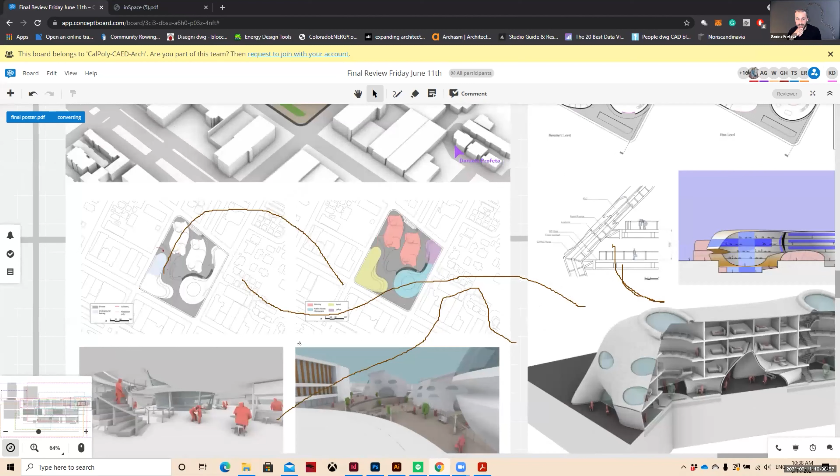I think it's a great series of comments, and I love the comment about how to deal with this threshold or movement between interior and exterior, whether it's about circulation from the public plaza into the underbelly, or at a larger scale, your attitude towards the whole block, Kaustub. I find it telling that when I look at your larger site aerial view, it seems like the only moments where you're able to interrupt this formal exploration - this soft curving and swelling of figures through clear cut lines - is only at the edges of the site, right? The only moment where you negotiate this threshold between a linear element and extended curvatures is at that edge, at the given building plot.

I wonder if there's a way you can start negotiating these two conditions also within the overall organization of your building, or between each of the parts, or between the public elements of circulation and the private spaces of inhabitation. In your latest section, it's very telling that you have these two large volumetric figures that still borrow from the soft figures of circulation, while all your housing occurs in the center with a very rigid subdivision of spaces. I love these moments where the two butt heads with one another, like this central moment where a bedroom suddenly has to engage with this belly pushing in.

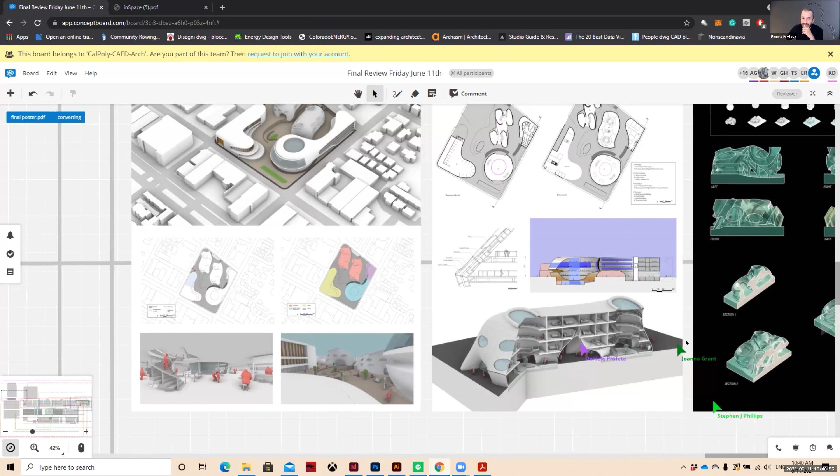I think that moment of transition between the two characteristics—between a more rigid, linear, stable kind of organization that needs to give way or engage with this other entity, this other figure—I think all of those are really rich moments that you can definitely keep in mind as a way of pushing forward in your project, because there is a lot of potential in that moment.

It becomes a little less successful, in my opinion, when you look at your top view and the intersection with the Northern street—I think it's Logan. It produces a radical sort of barrier between the interior, which you've been talking about as a public space of continuity with the space of the city, and instead, two levels down, it produces an edge, a completely insurmountable edge between the two sides.

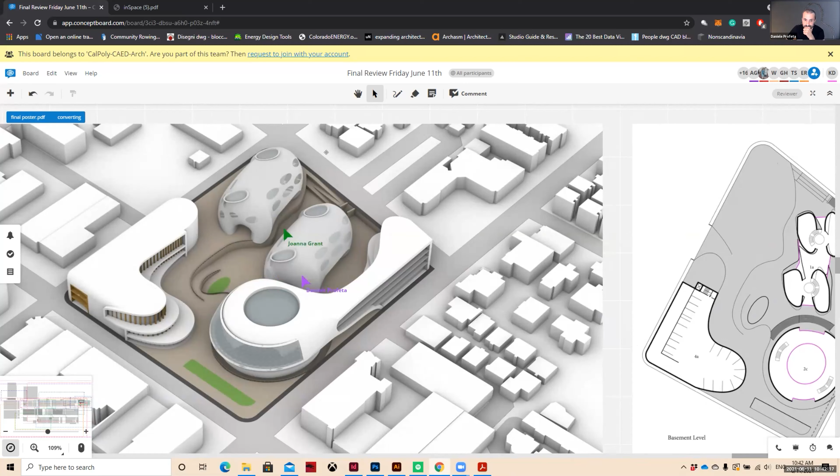So this act of mediation between these characteristics, I think it's really important, and I hope you can keep it with you moving forward in your design. Thank you. Thank you very much.

I'm not sure Charlie's going to make it, so we might be ending early. If there's any last words from all of you—I appreciated your time, and actually very considered, thoughtful and generous commentary from the critics for some of the projects. Obviously all of them were, it's been uneven here.

No, I mean, I think the work was impressive. That's a lot of program. I know that you said you usually do over 1 million, but it's still a lot of program on that site. I mean, it's just even as an urban design problem, it's quite the challenge, and there's all the kind of formal operations that are just very difficult to resolve.

So on the last project, I'm thinking about Anish Kapoor's Cloud Gate, AKA the Bean in Chicago, and what's interesting is finding a way to actually bring it back down to the ground. These are just tough formal problems—what is the precedent, and in your project, would it have been easier to see those volumes being fairly monolithic, but maybe have the ground changing around them? That's what I'm saying—you have to take some of these opportunities and just let it go wherever it goes.